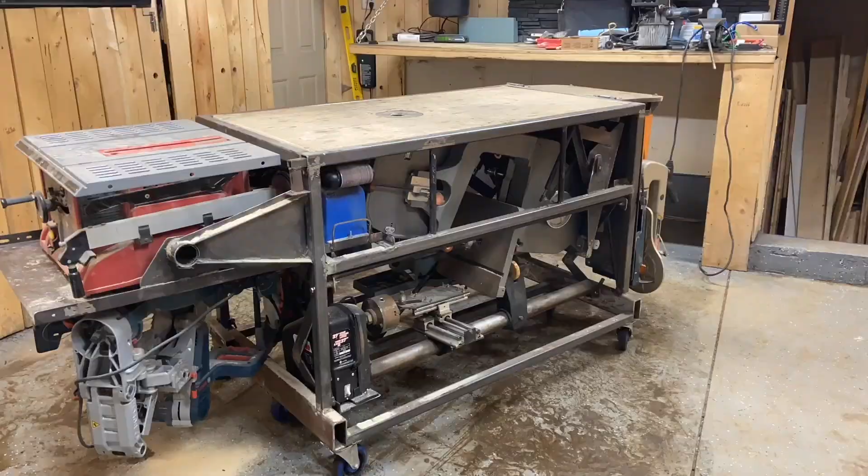So this is the second iteration of my toolbench. It came about from necessity, as I had more tools than I could fit in my two-car garage. So I managed to design and build a rolling toolbench that incorporates 12 tools into a very small space.

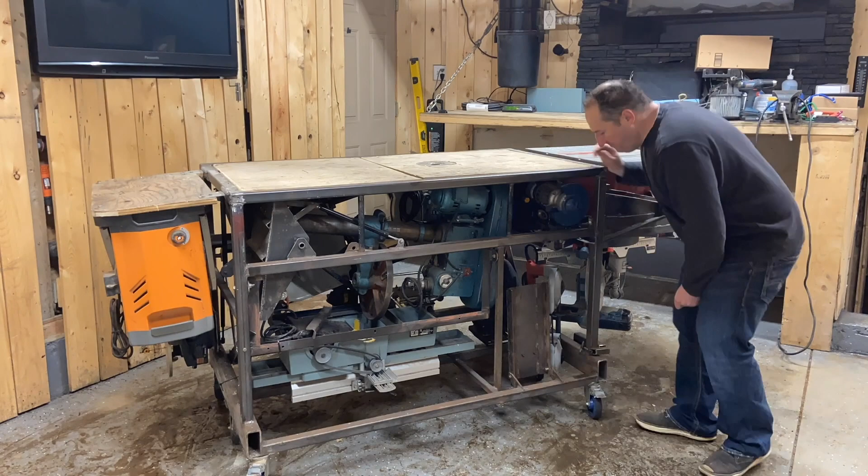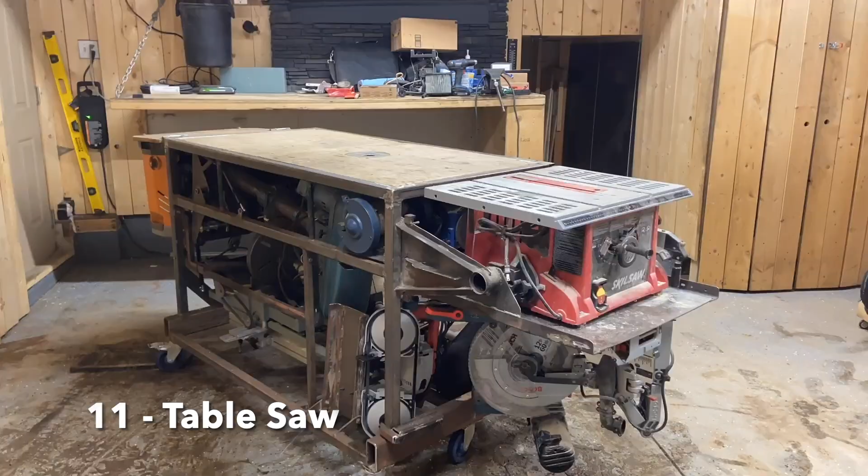These tools are all corded, and I bought most of them used. At first I wanted to have them all plug into a common electrical manifold so that they were all powered up all the time, but then I changed my mind as I felt that may have been a little dangerous. I also wanted to have a dust extraction system built in, but that proved to be far too difficult.

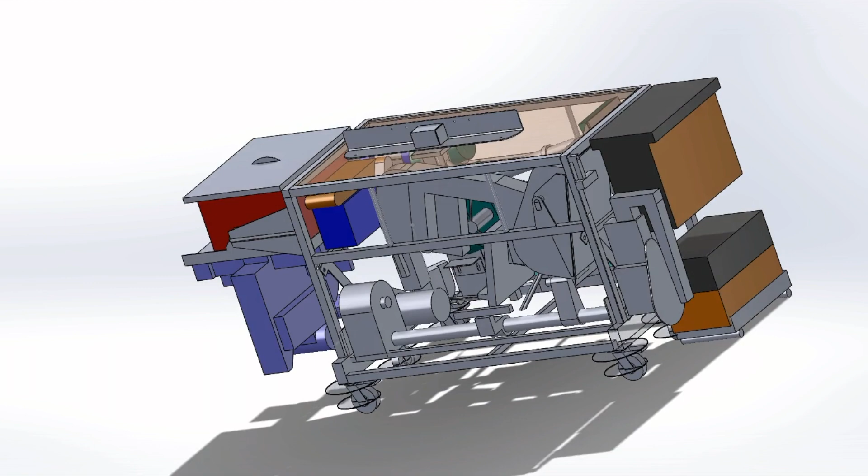As you can see here, I started by modeling up the design. I measured up each one of my tools and tried to get them to fit into a space that would fit in my garage. Then I made sure that they could each pivot or move as they needed to without interfering with each other.

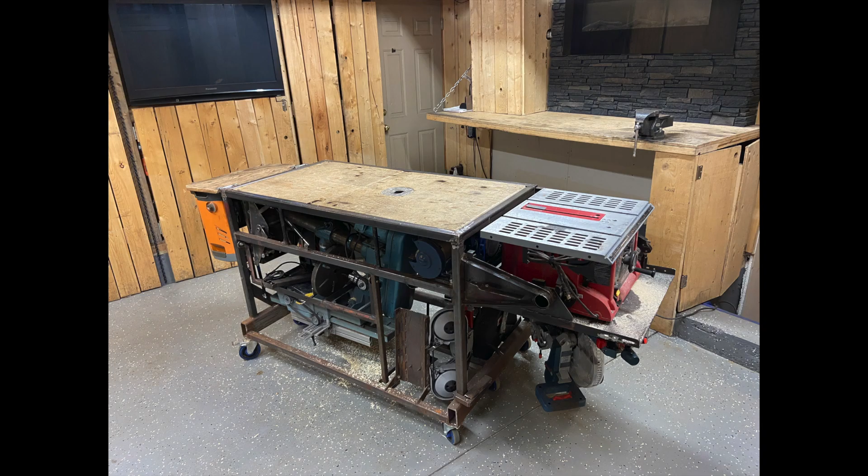The frame of the toolbench is made of common HSS, flat bar, pipe, angle iron, whatever I needed to mount tools to. I welded it myself, and I am not a welder, but in order to have both of our vehicles still park in our garage, I had to fit it into a certain space, which was 43 inches high, 36 inches deep, and 101 inches long.

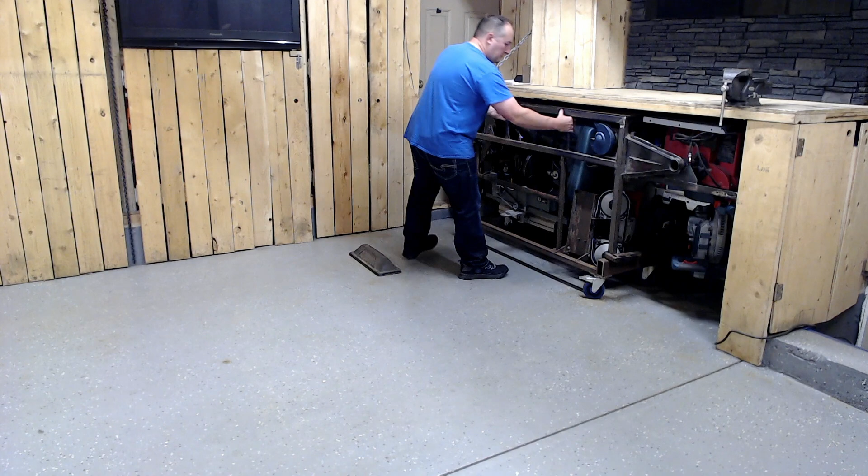As you can see here, the movable tool bench fits underneath my fixed tool bench. I pull it out whenever needed. It's on casters, moves quite freely, but it is quite heavy, as you can imagine.

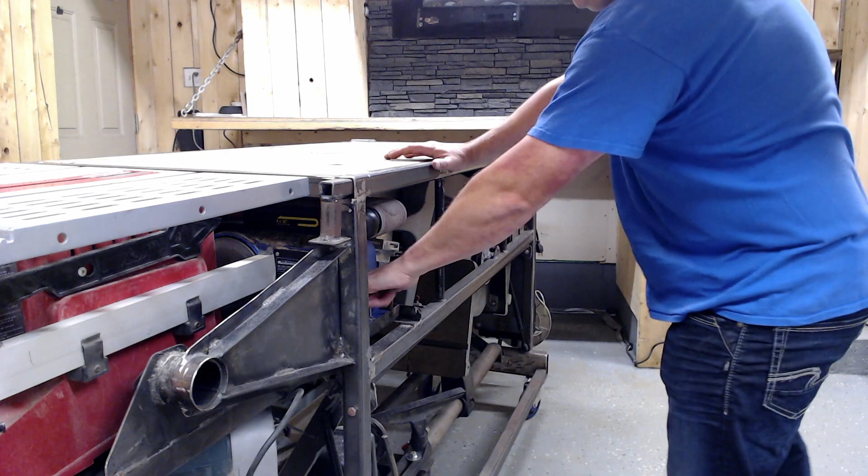So I was going to step through each one of the tools here. First I have my sander. It just slides out nicely.

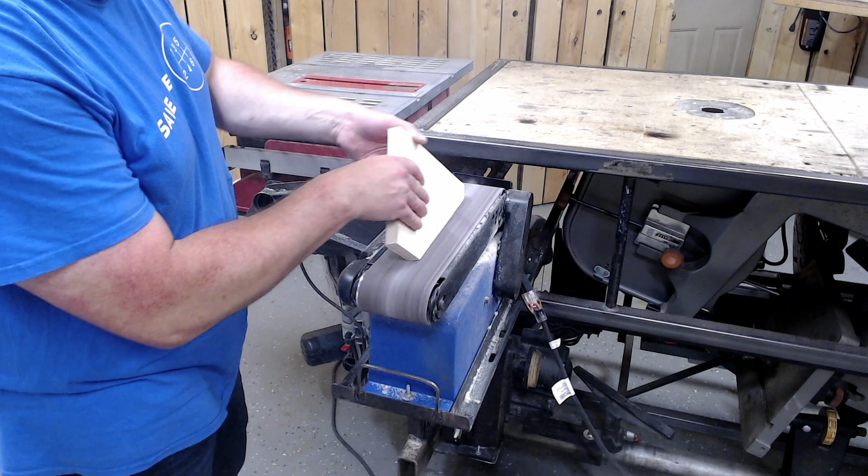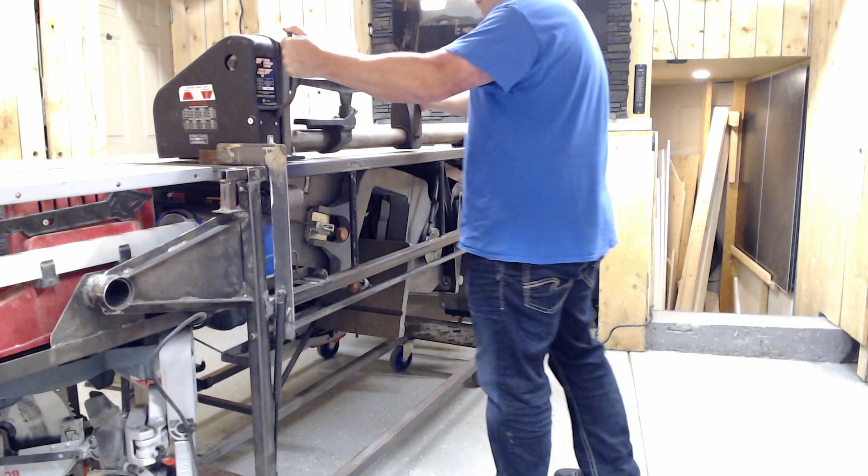Next I have my wood lathe. It's tucked in at the bottom. I put a handle on the headstock so I can easily grab it, and then I grab the tailstock as well and lift it up and over, and it sits and rests on top of the tool bench itself. Now I got some crazy linkages there to allow that to happen, but I also have some spring assist. There's some gas springs on each side that help it lift up.

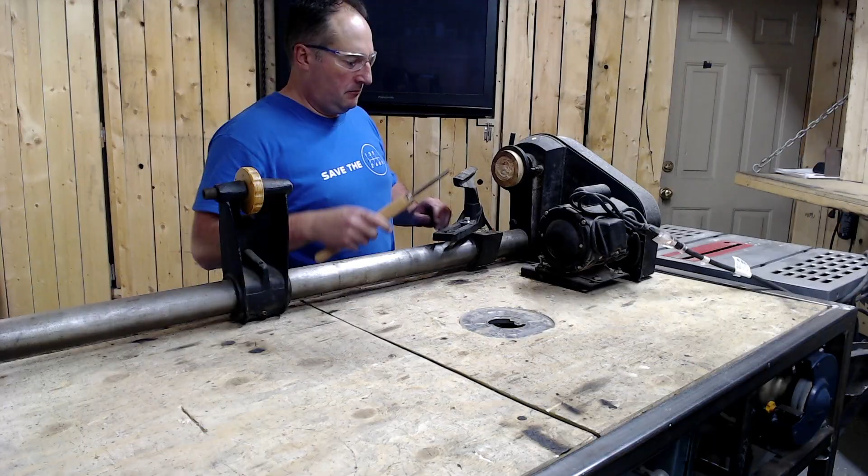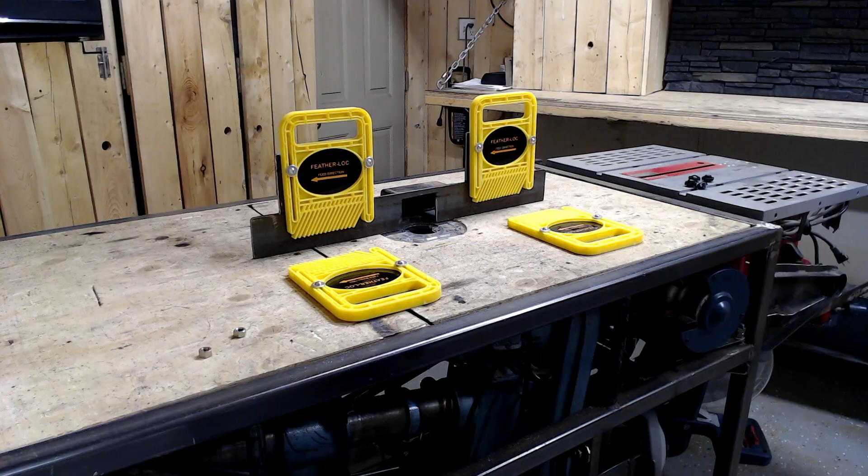The top of the tool bench is a spoil board that splits in half. I mounted the router to the underside of the one, and once you put the fence on top with a bunch of feather boards, it works like a table mounted router. Works pretty good.

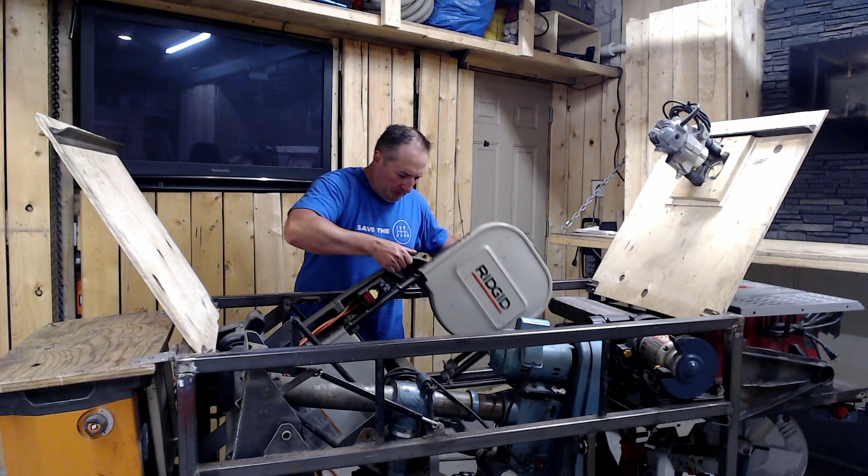With the top of the tool bench opened up, you can have access to the bandsaw underneath. It pivots into the upright position with the assistance of a couple of gas springs.

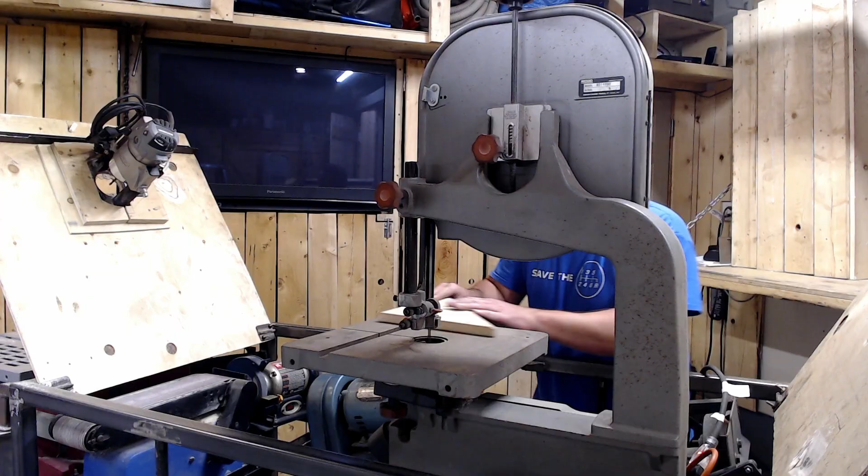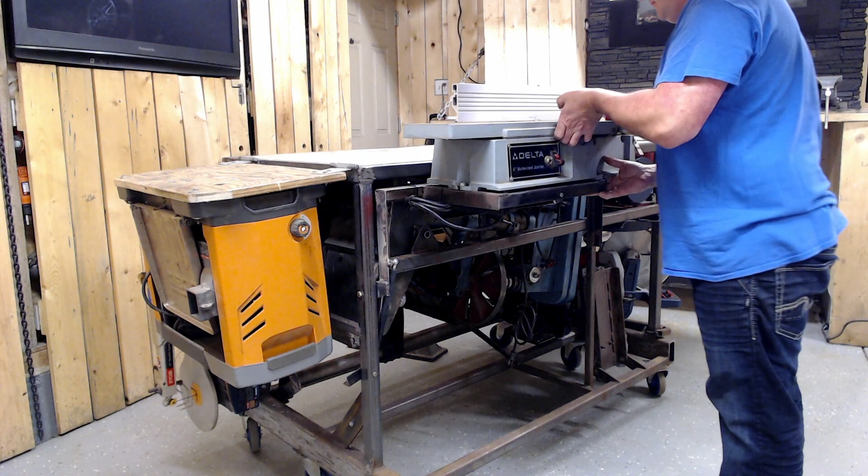My jointer is kind of hidden underneath. It pivots and locks in place in the upright position so that I can get a garbage can underneath it for all the sawdust and chips that come off of it. It also has a gas spring to assist it in lifting up as well.

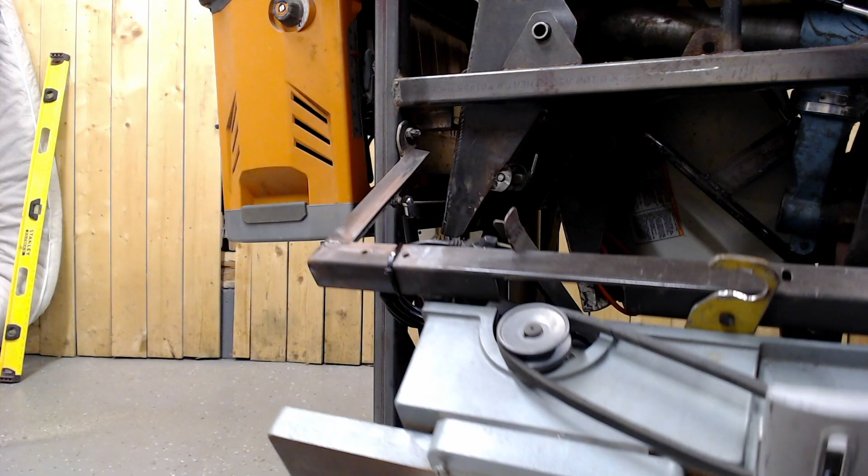The bench grinder just pivots, comes out, locks in place.

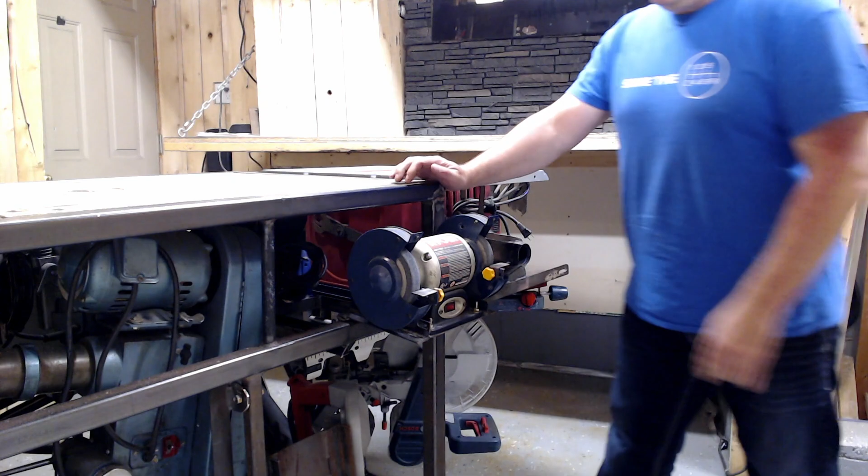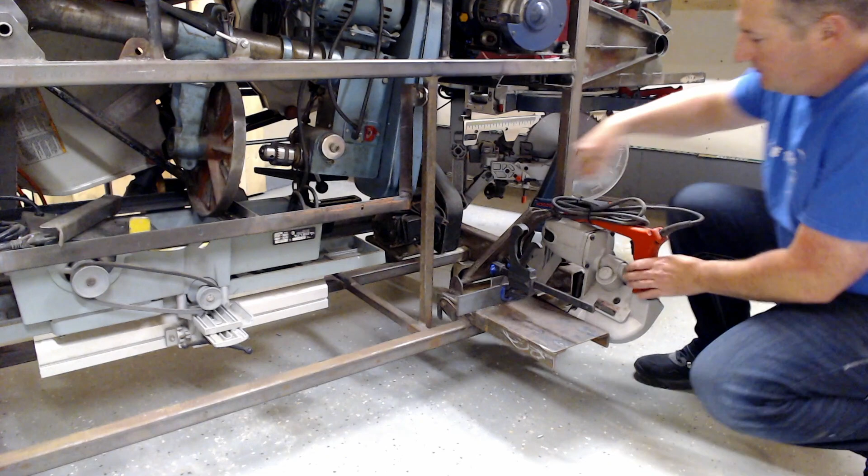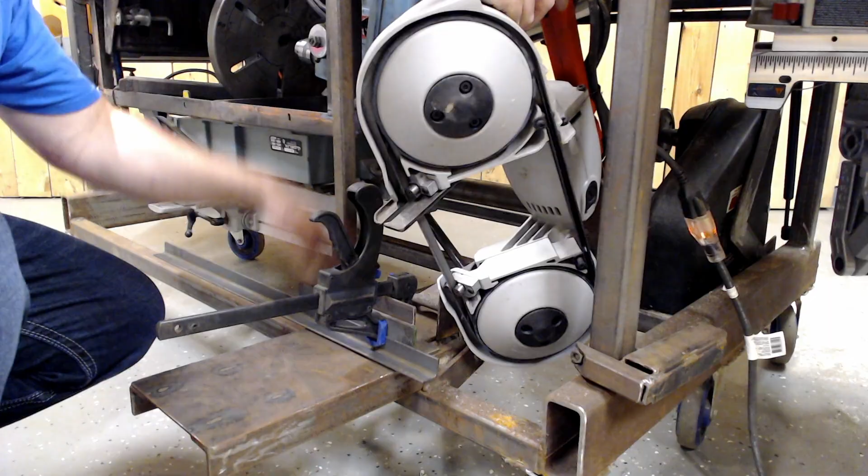Below the bench grinder is my metal bandsaw. It pivots into place, and we remove a pin, which allows it to pivot up and down. And then it also has a slide that goes along the bottom rail of the frame to allow it to hold up longer pieces of metal. Originally I planned to have an abrasive cutting wheel here, but the bandsaw is way better.

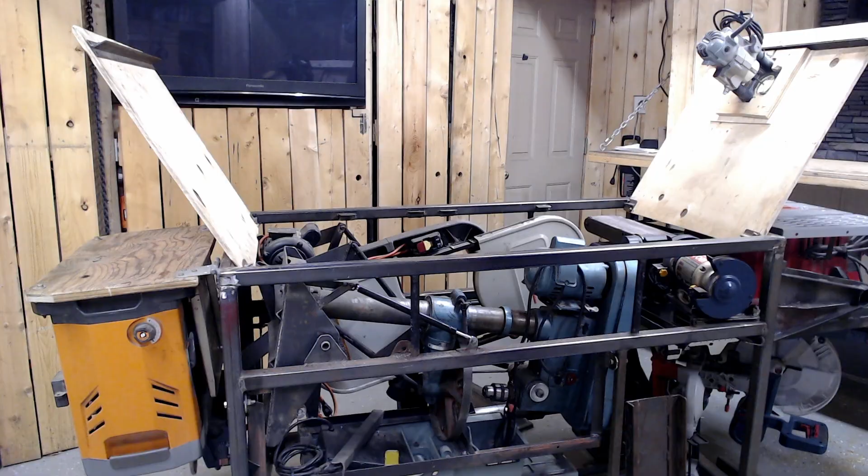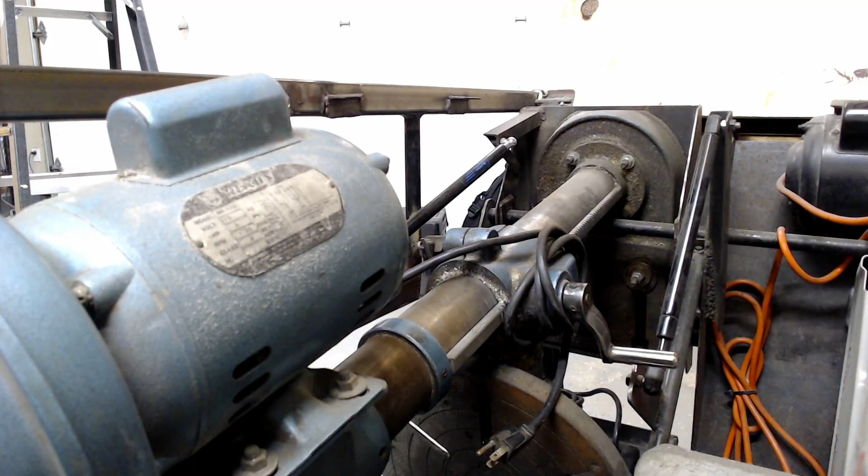Once again, with the top open, you can get access to my drill press. Now this is quite an old drill press. It still makes semi-round holes. It's quite heavy. That's why I have 2 gas springs to help it in raising into the up position.

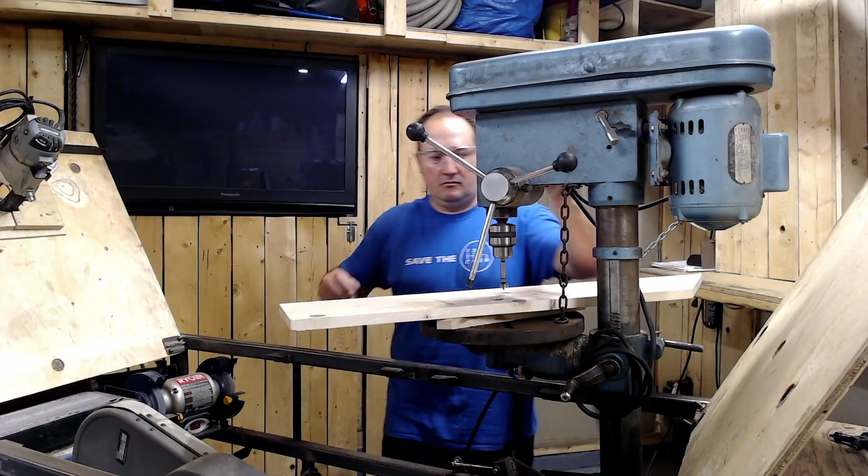On the one side of the frame, I have a removable post that slides out of the frame. I use it to support the scroll saw when it pivots into the up position to a nice working height.

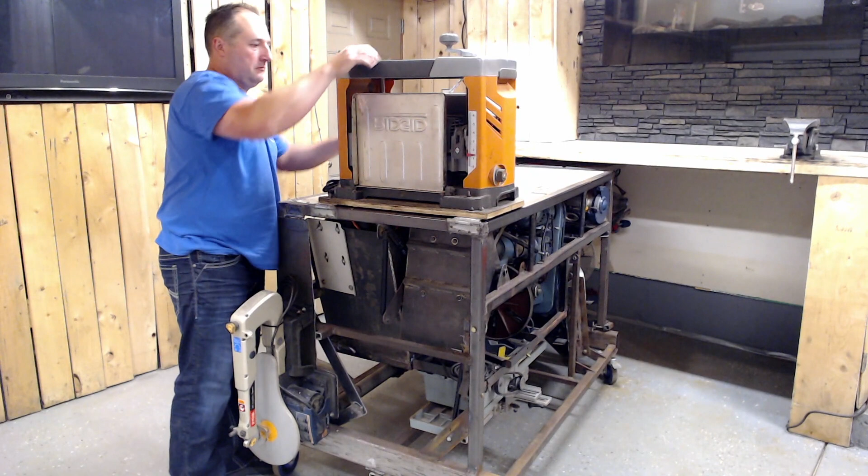The planer quite simply hangs off the back of the frame of the tool bench. It pivots into the up position, folds out, and uses the rest of the tool bench as kind of a run-out table.

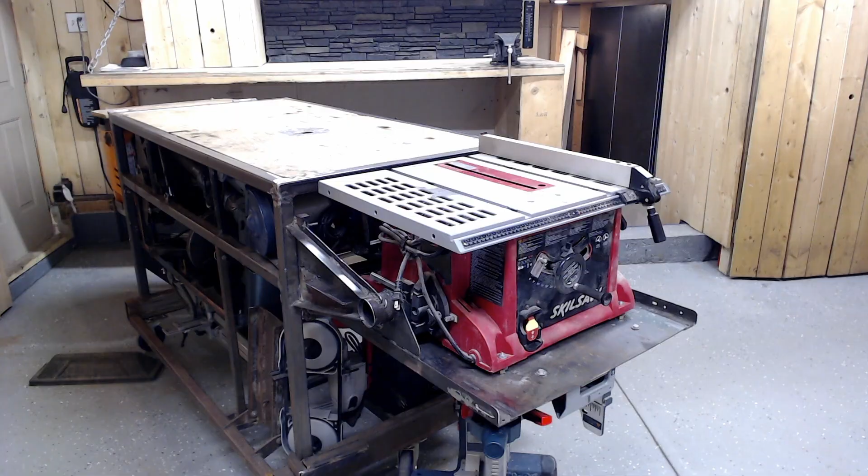In the stowed position, the table saw is in the ready position. It uses the rest of the tool bench as a run-out table at the right height.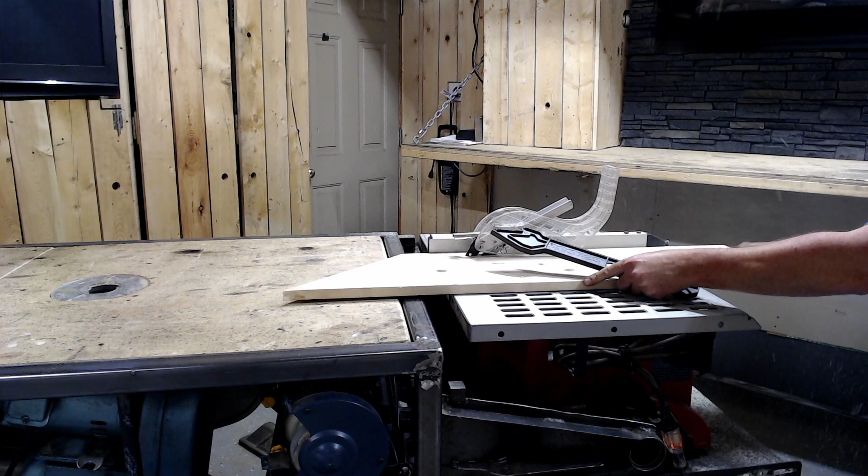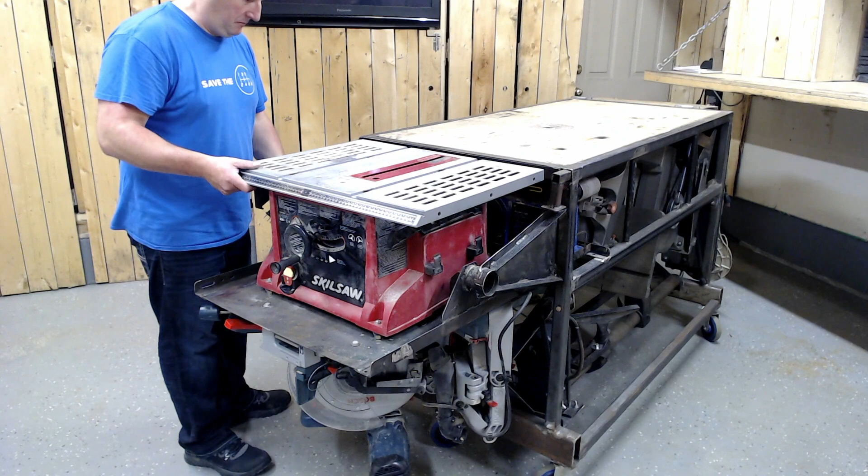Now, underneath the table saw is my miter saw. To flip that around, you pull the lever out, which unlocks the pivot, and then you have to pivot around so that the miter saw is on the top. Once in the top position, you put the lever back in to lock it in place.

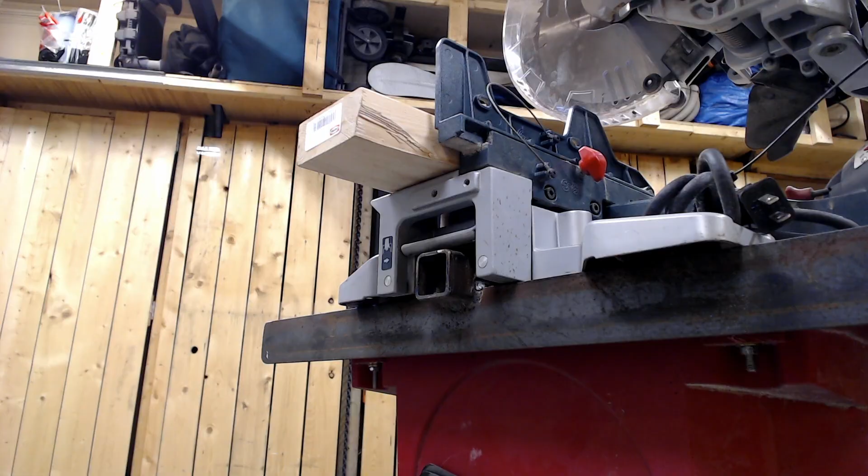What's interesting here is that the rest of the tool bench also serves as a lead-in table for the miter saw at the right height. So once again, I remove the post from its storage position in the frame and insert it into the slot below the miter saw, which then becomes a support for anything on the run-out side of the miter saw.

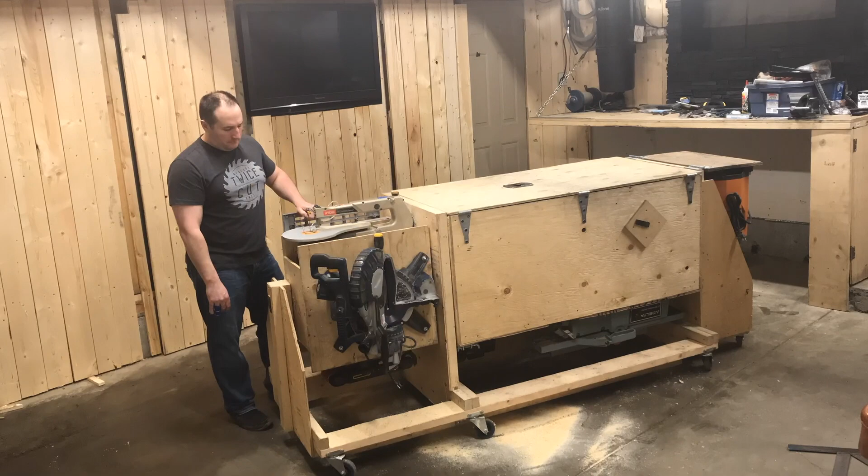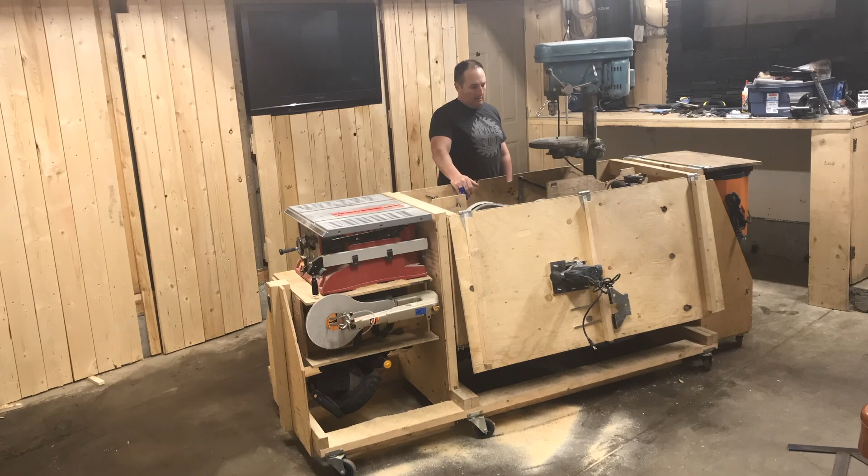My first tool bench was made completely out of wood. It worked well. I actually wore it out, causing me to have to replace it with this new one. It held 10 tools, but it had some problems. Seeing as how it was made out of wood, the wood would flex and cause some issues with making a straight cut sometimes.

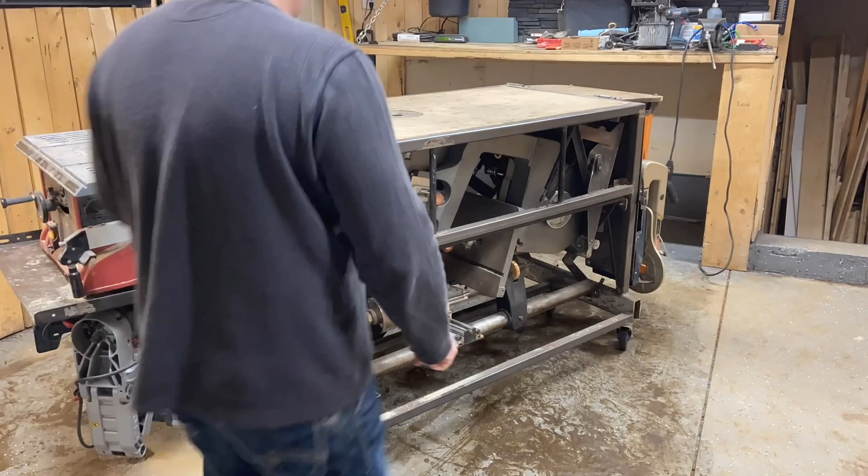On this old tool bench, all the chips and sawdust that came off all the tools would get captured in the main body of it, and as it would turn around, you would just toss them around and make a huge mess. The new tool bench is a lot more open, allowing all those chips and sawdust to fall to the ground. So once again, here's the clip showing all 12 tools on the new tool bench.